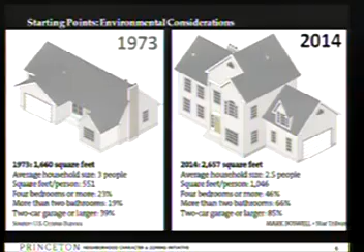If you recall the pictures I had up, a lot of those homes were probably circa '73 or even older, so they were smaller homes, and the demand seems to be for bigger and bigger homes.

As we go into the ordinance and the study area, most of the smaller lots are what's affected. As you got further out into the township, there's a scattering of homes demolished, but the issues were not the same. When you get an acre of land or 3 acres, the size of the house was not a problem - they're not in as close, not directly affecting their neighborhood.

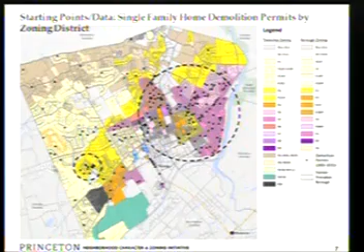There was also a small but significant cluster in the Edgerstoune neighborhood off to the west part of the community.

In addition to looking at demolitions, the consultant also plotted single-family home additions by size, and you can see the scatter of these homes largely mirrors where the demolitions were occurring. There were 355 additions that we tracked. Approximately 169 of the homes had an addition of 500 to 1,000 square feet. 110 of the homes had a 1,001 to 2,000 square foot addition, in some cases almost doubling the size of the home on the lot. And 76 of them had an addition greater than 2,000 square feet. So we're seeing a lot of additions as well in the same part of the neighborhood.

And that's a total of 355. To understand some of the numbers, the 2015 American Community Survey data indicates that there are approximately 7,762 one- and two-family units in the Princeton community. So when you combine the additions with the tear-downs, we're getting close to the 7 to 10% range in terms of the number of homes that are being affected. Not a huge number, but a significant number, I think.

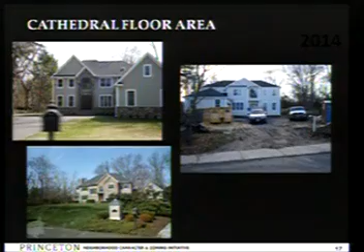In terms of cathedral floor...

Section 3 in the ordinance deletes the existing borough regulation which allowed porches to encroach in the front yard. It was limited to a very small porch, and in the back section of the ordinance, what we're going to do now is, hopefully with the creation in Section 2 of those new design guidelines, add to those over the coming years as we develop more design solutions.

Section 4 of the ordinance simply provides the standards for calculating the mean prevailing setback that we talked about in the beginning section. We're modifying it slightly from what the ordinance said, hopefully simplifying it from what it was before. Just a couple of points.

We'll now look at 500 feet in either direction on the same side of the street, within the same zone, in determining the prevailing front setback. It does allow, when you use the mean prevailing front setback, a plus or minus 2 feet, because we're not locking somebody into a build-to line — we're providing a little bit of flexibility, realizing that it's an averaging number. So we're still giving them a plus or minus 2 feet in which to do that as well.

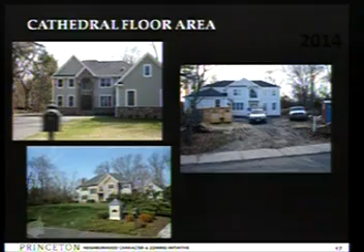That's a brief summary of the applications and what we were trying to do. I think it may be good if the board has questions, I'll try to answer them in any order that you want. I appreciate you letting me run through the presentation.

Okay. Thank you, Lee. Jenny?

I didn't notice this before, but for the ordinance about garages, is it clear that the facade is where the front door is? Because the example that you showed, if there's a garage, couldn't you just say the front facade is the garage? Do we need to define that? I don't know if we do. I think the only place that comes in is if the garage is forward of the house, a side entry garage so to speak - you've seen some of those designs. But what about those barn houses where the whole facade is the garage? Well, it does have a front door, so it's not... But so the facade, is it just implied that it has the front door?

Yeah, I had exactly the same question that Jenny raised when I looked at the picture of the two snout houses, I apologize for the term. It struck me that the language doesn't necessarily prevent that. What we are hoping to accomplish is to have the front door be either even with or in front of the garage door.

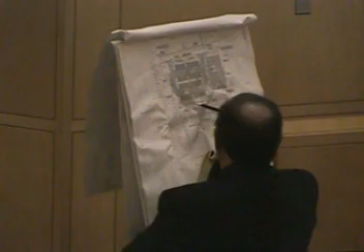The next comments deal with the tennis court improvements. SPRAB has requested that the applicant reconsider the walk configuration between the parking area and the individual tennis courts. I think what they were looking for is there's a walkway here through the parking lot, a sidewalk that runs in a V shape, and they were hoping to have something connect more directly to the tennis courts, near this detention basin.

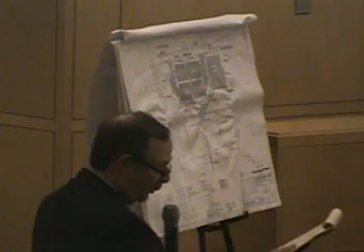They've asked that the applicant reshape the detention basin to connect a ramp to the center walkway, which is also what I was showing, and that they provide a pedestrian link along Campus Road between the field house and tennis court. There's a sidewalk that runs along here and goes up to the field house, and they were asking the applicant to come up with a slightly different version of that.

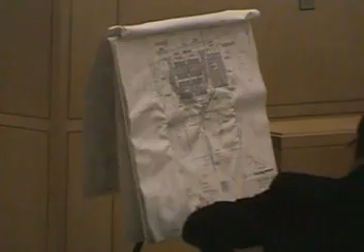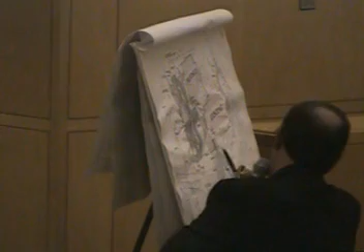Next is the field house. SPRAB has asked that the applicant provide a mulch path connecting the west entry sidewalk to the south entry. So they're looking for some sort of mulch path in this area, from the proposed new entrance to an existing site entrance on the south.

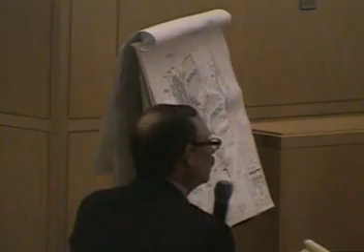They also asked that the applicant consider modifying the pedestrian path that connects the west side of the parking lot to the tennis courts. A curved design would be more desirable. What is shown is sort of a right angle, and they're looking to have something curved through there, more in the direction of what students are most likely to be walking, instead of in straight lines.

They suggest that the ice rink loading area be moved to the campus road, that the applicant consider solar panels on south-facing roofs, and green roofs on areas of flat roofs. They want the bike and pedestrian connections coordinated with our master plan, and they support concrete curbing instead of Belgian block curbing in areas that are less visible. They've also asked the applicant to provide proof that they've received all the NJ DEP permits needed for the riparian area.

In terms of landscaping and lighting, they've suggested that the final plan be reviewed by the board's landscape subcommittee, and that the applicant develop a plan for the emerald ash borer. They've suggested that an evergreen buffer between the middle school, the parking lot, and Great Road be more enhanced, that the ice rink loading area be screened from Great Road if it remains there, and that lighting in high-use areas be on timers and only lit when needed.

The Municipal Shade Tree Commission had a few comments. They noted that the rain gardens are in appropriate locations. They asked that a maintenance plan for the porous pavement be provided, that the planting plan meet the ordinance requirements, which has to do with trees and parking lots, and that fringe trees susceptible to emerald ash borer should be replaced.

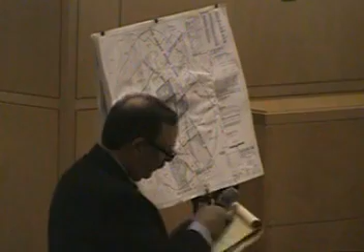For all flat roofs, solar should be considered, and/or green roofs. For general building, they have a series of comments that there's a need to provide covered and secure bike parking, and that the applicant should provide containers for trash, recycling, and organics as well.

They should evaluate ultra-high efficiency toilets. All exterior light fixtures should have full cutoffs and timers. LED lamps should be used. Energy Star appliances and windows should be used during construction.

That the applicant use ASHRAE 90.1-2010 instead of the 2007 version, or a more current version of what's currently required. That they should use FSC lumber, avoid any of the red list materials — and they provide a list of those — use green building materials and finishes, and provide an indoor air quality management plan.

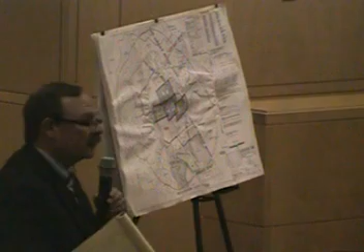That's a summary of the staff reports, as well as the advisory committees. Brian Stankus, our traffic engineer, is here, along with Jack West, the land use engineer, and Derek Bridger, the zoning officer. I don't know if you guys wanted to add anything to this, or if we'll take questions from the board.

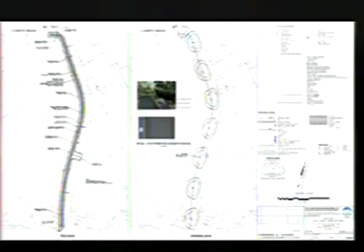Could I interrupt you just a moment? It's 20 to 11, and I wanted to ask what the future holds for this—he keeps saying he's going to speak about something later. This board generally doesn't stay after 11 o'clock, so I think we should take stock of where we are and where we're going. I assume you have a fair bit more for your presentation to go, much time? I can be done in less than 15 minutes. Right, but you have other people to present too. I think our remaining witnesses will be about 15 minutes at most, but then obviously there'll have to be questions—that's in terms of direct presentation.

All right, board members, where do you want to go with this? Do you want to try to finish? I think it seems doable. Anyone feel differently? Should we aim for 11:30? I think 11:30 is more than the outside. More than—she said to aim for 11:30 at the outside. I think that's probably too long. I thought we got 15 plus 10, 15, right? So that's a quarter after, but maybe they could even be shorter, since we don't have any members of the public left. Don't worry about that. Yes, we do need to discuss and tick off the things in the memos that you are not going to do, in addition to the presentation. Well, let's continue, let's go on.

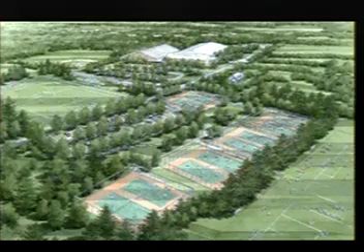Trying to get it to move. There you go, thank you.

So another view of the new tennis court, and now we get into the site plan. Parking lot is porous pavement. The sidewalk we've spoken about runs vertically through the center of the parking lot; we will take that straight down to the tennis court. The ADA ramp for the site getting down to the tennis court comes from the left-hand side diagonally down to the page, and we can rework the basin. Stormwater management for the site is porous pavement, stone storage underneath it, a small collection area in the triangle space, and a manufactured treatment device, discharging down by the stream just off the rendering. There is a connection from this parking lot to the field, suggested just north of the proposed tennis court, which you'll see on the next plan.

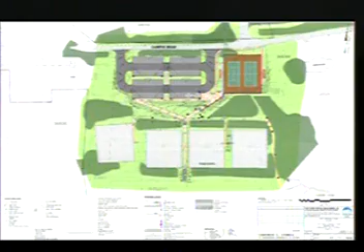The house that Mr. Stiletto was talking about is the one just off the page there. This picks up the walk on the left-hand side—this is now the field house. Stormwater management here is porous pavement, stone storage underneath, and a manufactured treatment device. There was a concern from SPRAB to connect the entryway to the south off of Campus Road to the front of the building, so we'll do a mulch path there, completing a circuit that goes from the academic campus to the building, connecting to the front of the building, and then over to the parking lot by the tennis courts.

Because of the reconfiguration of the parking lot, we're only adding 6 spaces in this location, but the parking lot over at the tennis feeds this area, feeds the lower athletic fields that we were talking about before, and we do think they'll be used.

You do see at this location the suggestion of the entry into the loading area behind the ice rink, so we will come off of Campus Road. We will eliminate the drive out to Great Road West, and this is the source of one of the other variances that we're asking for. We're not increasing this area, but it currently violates the 75-foot buffer off of Great Road, and we're going to add some more landscaping at this location.

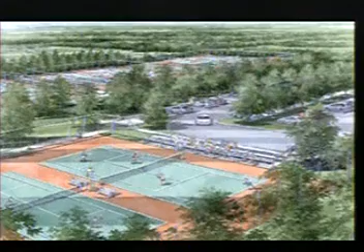Yeah. Well, I hope I can. Yeah, thank you. Going the wrong way.

The reason I'm raising it is it's on our master plan, that's a draft, but I think we're likely to approve some version of it, so that's the one thing where it's already there, it's been on the website, we've been discussing it for the past year, and that's something I just know is going to be coming up.

I'll just say that Transco's pretty tough. We've done a lot of work over and around, and approvals through them are very difficult. But I'm all for it. On the other piece of property we were working on, they were open to it, but they couldn't grant us the permission because they only had an easement for their own use, not an easement for public use.

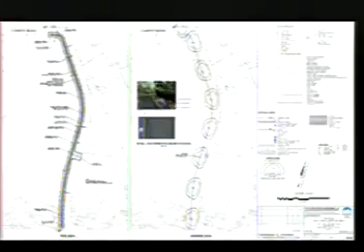Any other questions? Yes, anyone? Okay.

Call our architect, Steve, I'll get the last name wrong - Dadagian? Close enough. You want me to sit here? Yeah.

Sir, we'll swear you in if you would raise your right hand. Sure. Do you swear or affirm your testimony this evening will be truthful? I do. Thank you. Can you hear me okay? All right.

My name's Steve Dadagian. I'm the architect for the Field House. I work at Architectural Resources Cambridge, ARC, in Boston. And the drawings I'm going to show you today are our schematic design documents. So I thought I'd run you through the building quickly.

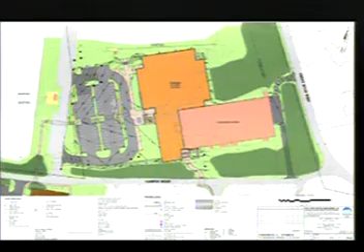This is the bird's eye view of the Field House. Before we get into too much detail, I should say we as a design team and the client are going to register this project under LEED version 4. We're not sure what target we're going to go for yet - it's a new system, a little more rigorous than version 3. Under version 3 we were going to go for gold; under version 4 it's uncertain. So a lot of the comments in the building section address sustainability - we'll be addressing most, if not all, of those issues, including bike racks.

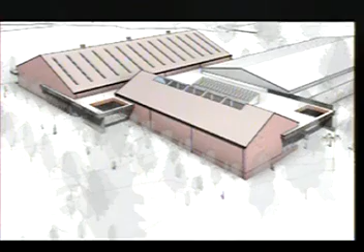This 3D view shows how we made an effort to break down the mass of the building into its component parts. The main parts being the field house at the far side, the gable roof closest to us is the 6 squash courts, and the flat roof joining all the pieces together is over the main lobby space. We are trying to maximize natural daylighting in the facility, so you notice we have a main skylight on the flat roof over the lobby, skylights over the squash courts, and ribbon skylights in the field house - the goal being to minimize the use of our LED lighting system.

In terms of materials, we have standing seam metal roofs. On the field house we're going to be doing an insulated metal panel - there's a large area there - but for the squash building we're going to be upgrading the materials to a masonry. We have entrances on the south facing the main campus. We've created overhangs, protected entrances at both the south and our entrance on the west that faces the parking lot. We'd also like to integrate some planted courtyards at those entries that would grow through the openings you see in the roof plan.

Mr. Letizia, I just want to clarify, your project architect right now is not licensed in New Jersey, but he has applied, and you anticipate that he will be licensed, so that if the board approves the project, you don't have a problem with the condition of approval that your project architect needs to complete that licensing in New Jersey. No problem with that. Okay, yes.

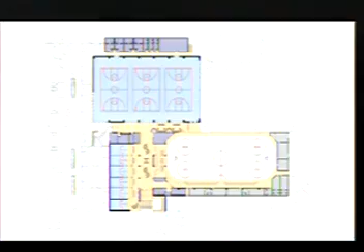On the far north end, there's a wing where we have changing rooms for visiting and home teams, in addition to locker rooms for refs, and there's some storage and mechanical space.

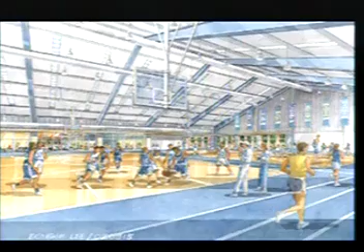And this is a rendering of the field house itself. You can see the ribbon skylights in the roof. We'll have LED lighting that will be on light sensors and dimmable. There's glazing out to the drop-off and into the main lobby space.

And that's it. Any questions? Anyone? Okay.

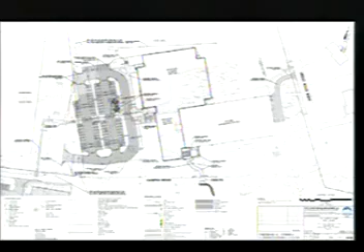You should know that about 10, 12 years ago, we did do a more detailed traffic impact analysis when the school enrollment did increase. That study did lead to the traffic light that's installed today at the Great Road. And so the main purpose from a circulation point of view of this project was to alleviate the queuing, especially the queuing that happens onto the Great Road.

I observed the queuing twice, especially in the afternoon peak hour when parents come to pick up the kids. It tends to be a longer process than the morning peak hour. And I think my observations agree with the observations that Mr. Stankus did of the queuing.

Basically what happens is, it starts at 3 o'clock, 1 minute past 3, where the queue length extends. I counted a total of 22 cars queuing up along the main driveway from the traffic light to the lower school. That includes between 5 and 7 vehicles that do queue up on the road. So when cars coming from the south on the Great Road enter, they make a left turn into the site, and then because they can't get into the queue, they drive around to find a parking place.

When you are there, you see it's very difficult to find a parking place. They drive into the first lot, which sometimes is full, that's immediately on your left when you enter, and then they drive around the other loops to find a space. So that's why we add more parking.

The 21 spaces on the east side of the loop, plus the 10 spaces along the eastern leg of the loop, are there to accommodate parents that want to park and either walk the kid to school in the morning or pick up their kid in the afternoon. There are quite a number of people who want to park and walk the kid to school, as opposed to those who queue up and have an attendant from the school pick up or drop off the kid.

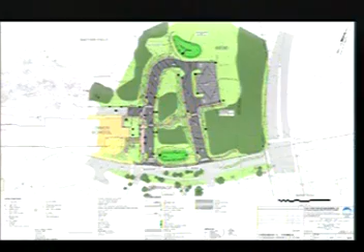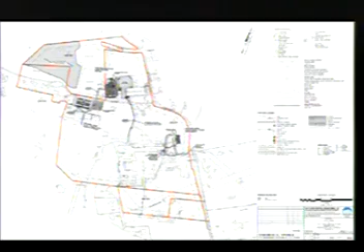Okay, I think we need to go through — you said you concurred with a lot of things in the reports, but I think we need to see just where we are on the reports. Perhaps, Mr. Letizia, it would be easier if you just identify what your client cannot comply with, and then the representation would be that all other comments they will comply with. Yes, I'll do that. If you just give me a moment, I'll review my notes.

There was a comment asking us to provide additional plantings in the planting islands within the parking lot. We agree to do that, so that's no issue.

Is that 5.2? Yes, under Mr. Solo's comments. Again, I'm just going to highlight where we may have some disagreement. Wait, you disagreed with that one - you will not put the additional plantings in? No, we will do that, so scratch that.

That's not a disagreement. The first point under the Site Plan Review Advisory Board comments, 7.1A1 of Mr. Solo's report - the ramp. We were asked to consider demolition of the ramp, but as was testified to, due to the elevation and location, we determined that's not feasible.